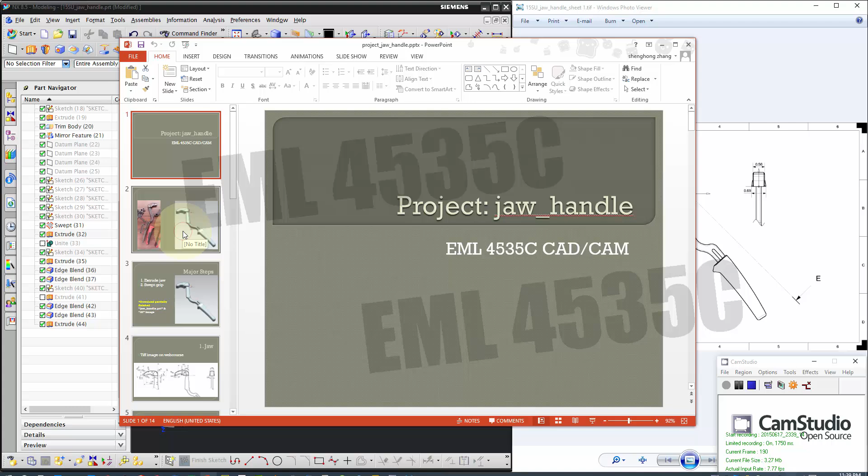Okay, in this video, we'll make the project part jaw handle. So that's the finished product, and we provided a partially finished part, which is this portion. Okay, so you can download this file from the web course, as well as this sketch or the drawing.

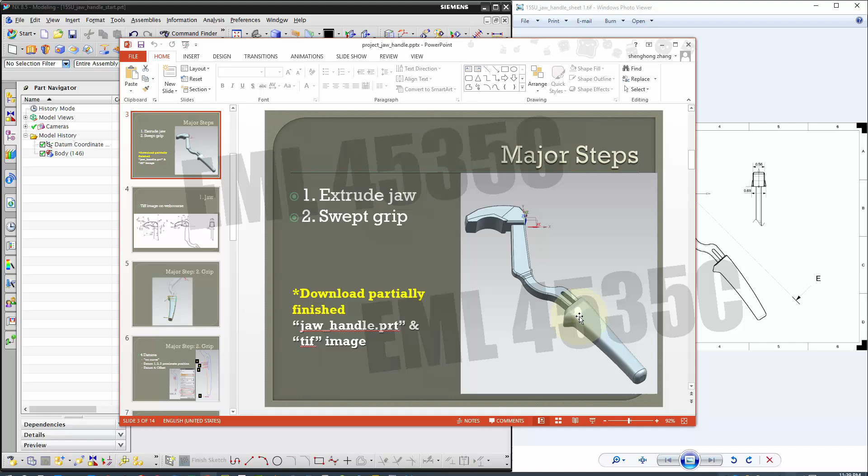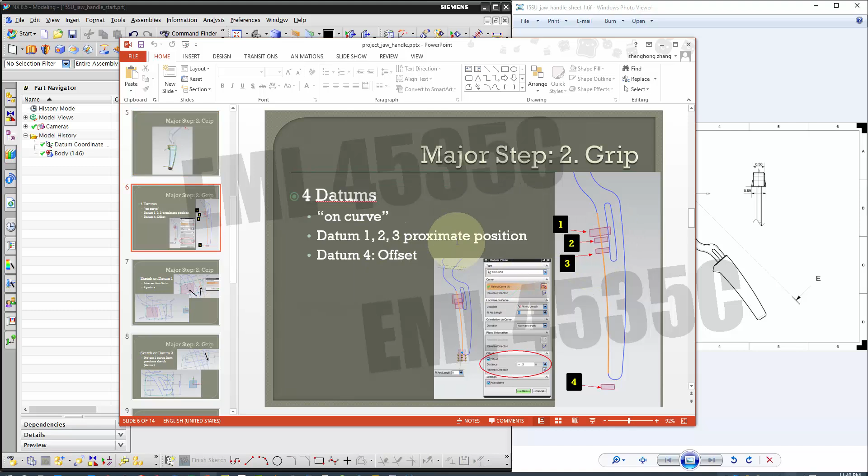So basically, what you need to do is make the extrude for the jaw and make a swept for the grip. Okay. For the swept, all the dimensions are in the slides, and the position of the datums are approximate. So just eyeball it. Okay. And let's start with the extrude on the top.

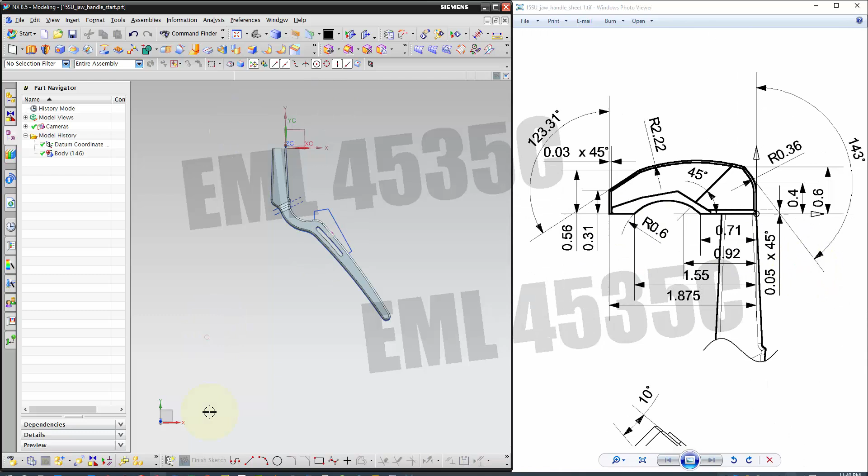It's a little bit messy on the dimensions, so we have two views to spread them. And as usual, we're going to start with a sketch on XY plane. Alright, so as you can see, this is the finished portion. Don't worry about that. You're going to start from the origin. Profile, and let's take a look.

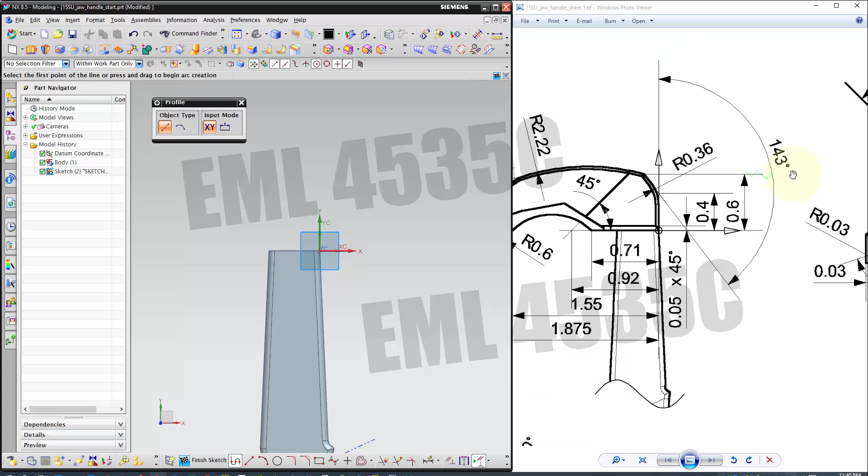We have, seems like a straight line going up and intersects with this line, 143 degrees, and there's a fillet at 0.36, then goes into an arc, a straight line, and straight line. Then you can add this piece later on. So I might start from the left side. So 1.87 is the total. Let's see, we can say 1.875.

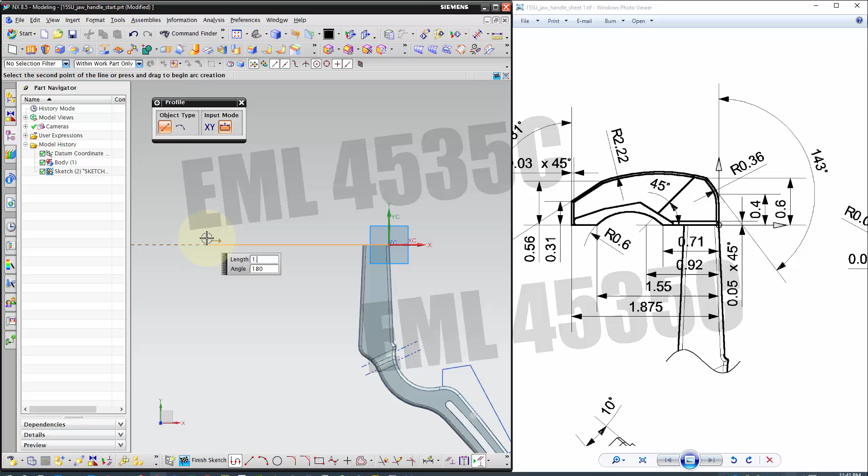Then go straight up 0.31. Then go this way, which we do have an angle 123.31. So I don't know how long, but I know the angle. Well, maybe just drop it first. Then there's an arc, so that's not tangent. I'm not gonna use profile. I just use an arc tool and avoid tangent constraint.

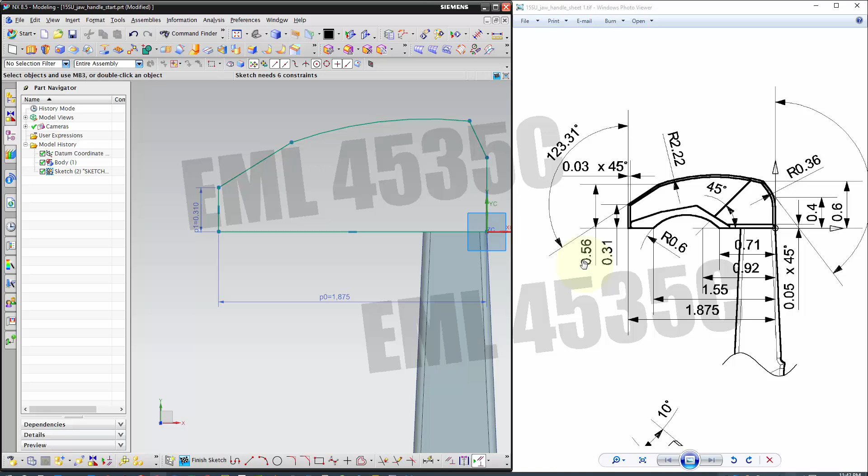Then here we have two straight lines, and their corner is gonna be trimmed away using a fillet. Okay, so now we can add more constraints, more dimensions. Then just use infer dimension. This we have 1.875. Then straight up we have the height 0.31. Then this 0.56 is to this angle line.

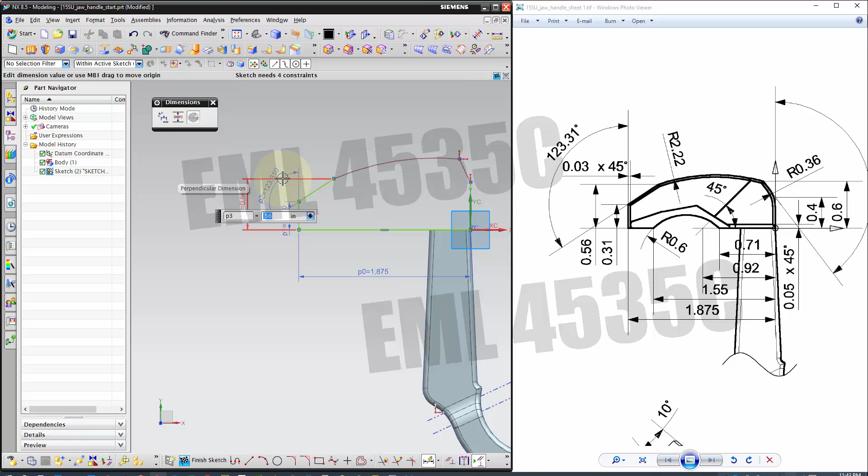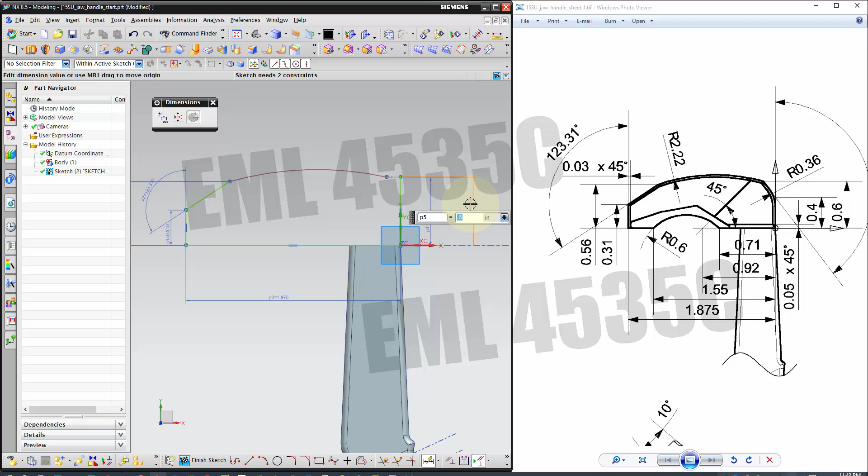So we'll put this angle first, 123.31. Then the distance from that point to the bottom line is 0.56. Then we do have the top two curves not constrained, so this height is 0.4. Then from the end of the arc to the x-axis is 0.6. Then lastly, there's an angle here, 143. So we want degree here is 143,

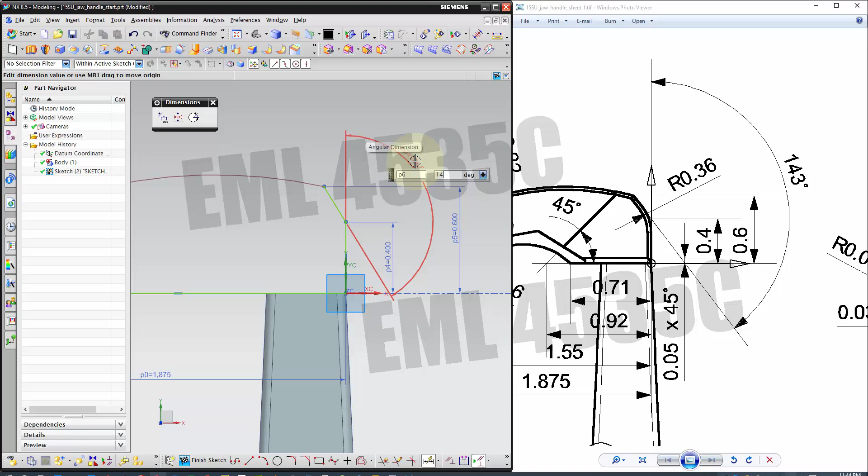and let's see, the line seems really short now, so let's go back one step. So it seems like we made one dimension wrong. Yeah, so this one should be 0.4. That is 0.6, and the angle between them, infer dimension tool, 143. Okay. The last one is this arc on the top. The radius is 2.22, and as you can see, this is all constrained.

Now we'll find this reference line, 45 degrees. So there's a line coming down here. We'll just overshoot. Okay, then we use infer dimension tool. 45 degrees, and the intersection point, we can trim this away first. Next step, we use infer dimension from this point to y-axis, is 0.92. Okay, that's it for the reference line.

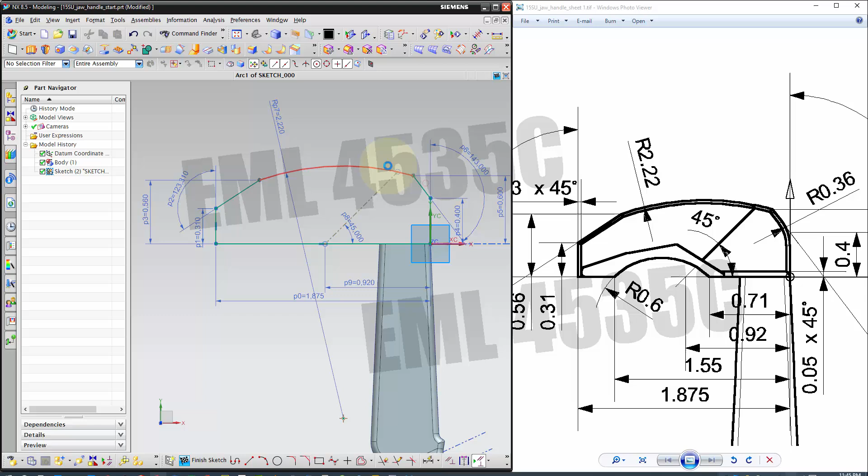So we'll turn that to reference. Then we can make this the binding parts, okay, for the jaw. And now this, we might need to look at this one. So first, let's find the starting point. It's 0.71 inch. Okay, so that's an arc, which is 0.71 inch away from y-axis, 0.71, and the other end is 1.55. So this might need to go a little bit lower, 1.55, and we'll drag this down a little bit.

Okay, then the radius, 0.6 inch. Okay, then the top portion, so we can take a look at this view. So 0.03 from the left side, go straight up. We do have a fillet there. Then on the other side, 0.03 going up, straight line at 0.58 from the y-axis. So pretty much like this. It's going up. Then the profile tool is better that way, going down a little bit, then touch the bottom.

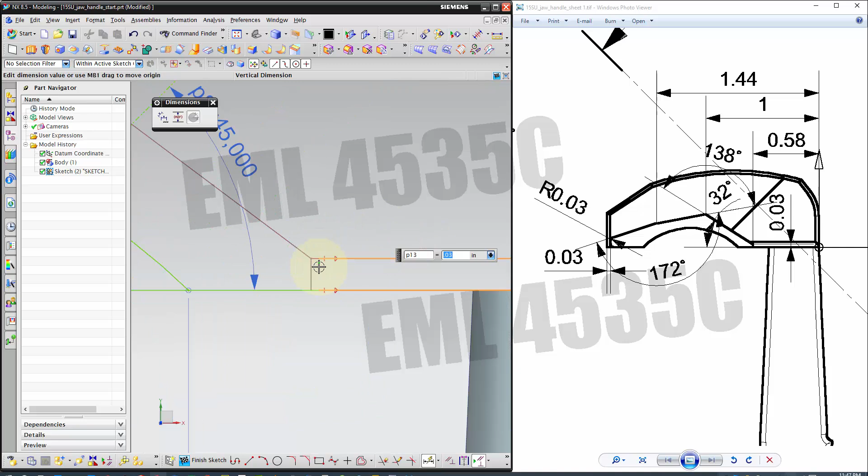Okay, then we use the infer dimension tool. This height is 0.03, then the distance from this line to the origin or to the y-axis is 0.58. Then we have 32 degrees from this line to the bottom line. Okay, you could put it here also. Then the top line is 138 to this 32 degree. So between them, 138.

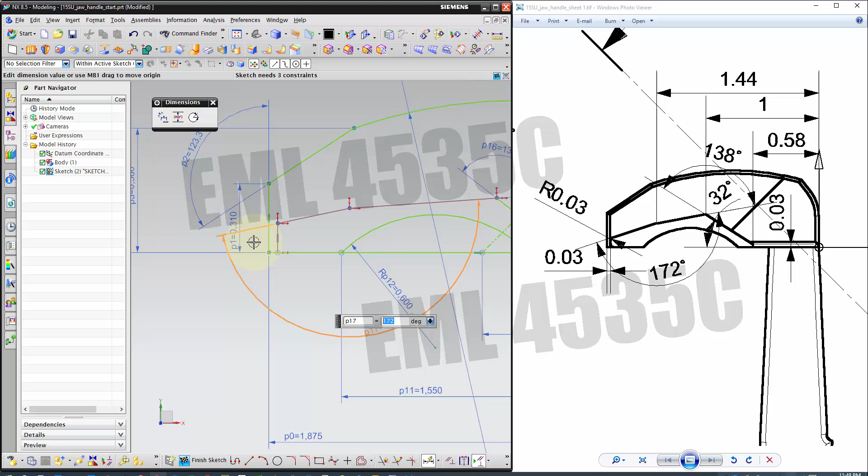And the last one, from here seems like between those top two lines, it's almost 180, so 172 degrees. And between the left to this line is 0.03. Okay, and we're still missing something. It's the top portion here, 1 inch from this point to y, and also 1.44. So from here to again 1.44. And something's not right here.

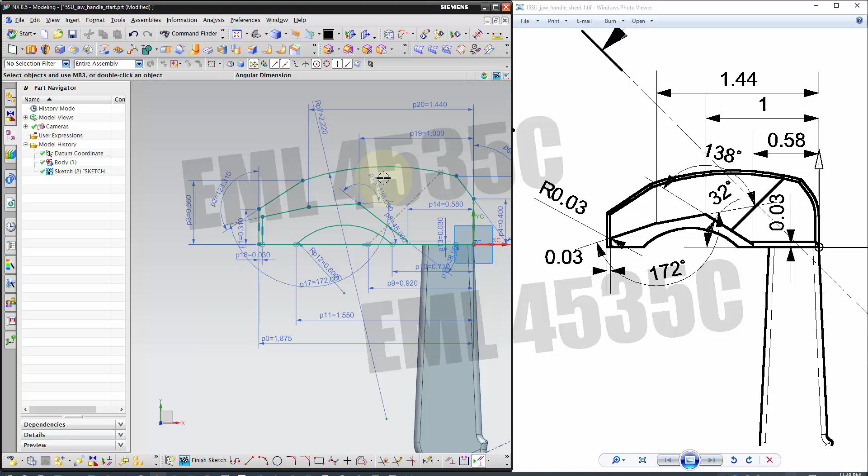So let's see, 138 is between them, and 32, 45. Okay, this should be 32 here. So that's why. Okay, that's 32, not 38.

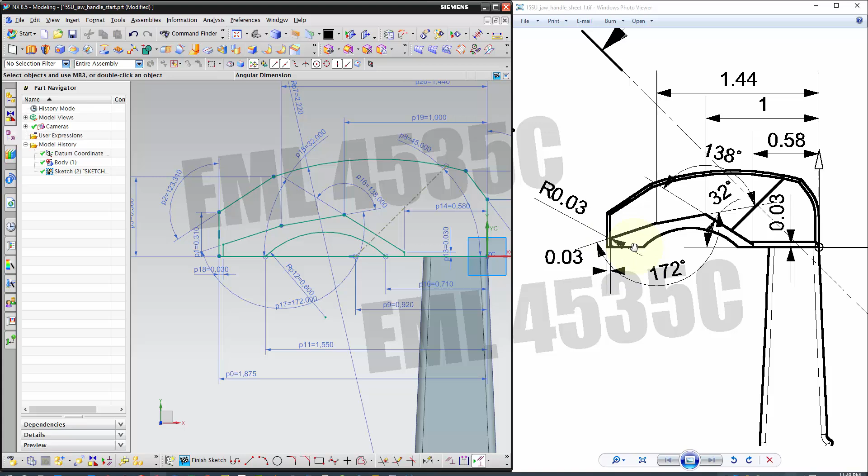All right, next here we have 2 round corners. You can do that using Edge Blend, or do it here in the sketch. All right, now I'll use Edge Blend. So my sketch is finished. Then how much I need to extrude? That's 0.56 symmetric for the bigger one. Then the smaller, the jaw portion is 0.69.

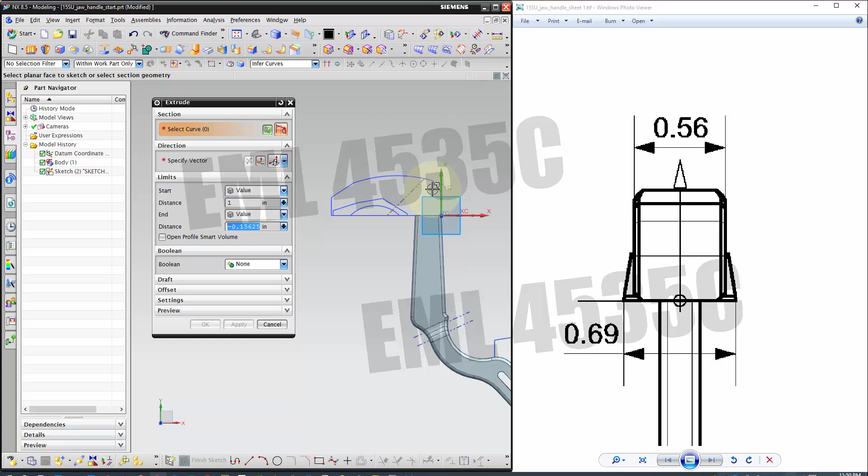Okay. Then we'll do extrude and extrude the bigger portion first. So I need region boundary curve. For this portion, I'll do a symmetric 0.28, which is half of 0.56. So apply, then we can take a look. Then for the next portion, this portion is also symmetric, 0.69 divided by 2, and okay.

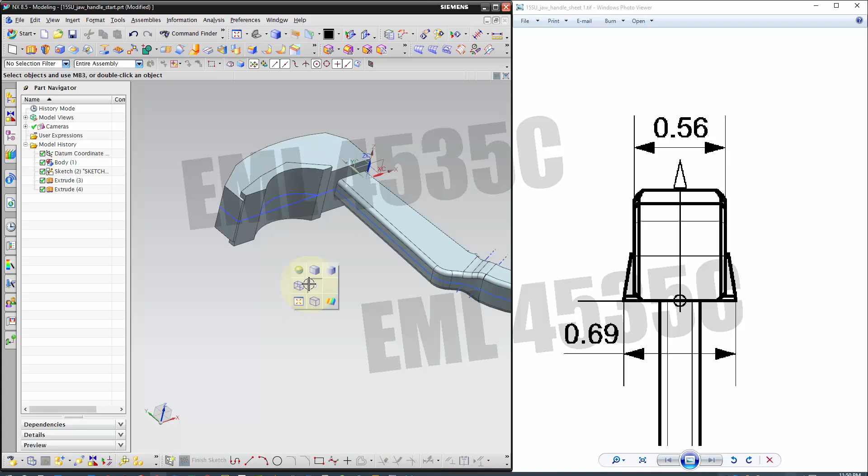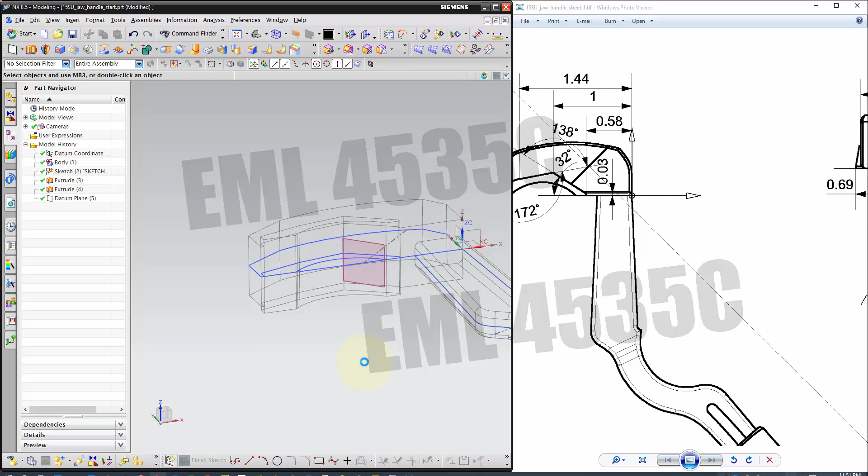And again, this head is tapered, so you want to build a datum on the reference curve. This way you can get a cut like this. So we need a datum plane, and we can just use Inferred and select this line, the end point of this line. It'll automatically give you a datum that's normal to this reference line. Now we'll say OK. So next step, we can draw a sketch on the datum.

Once you pick the datum, your sketch origin will be far away. If you like to, you can move your origin to the end point of this reference line. That'll save you one reference because you have y-axis on the construction line in the first sketch. Okay, so let's go back normal to the sketch.

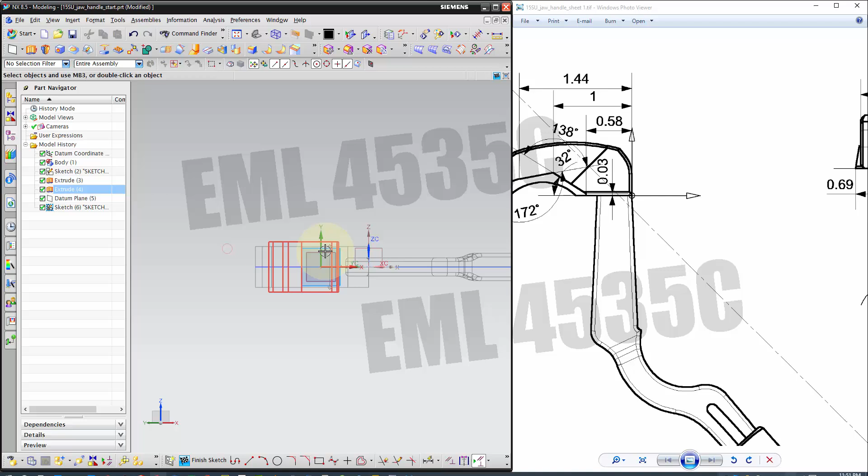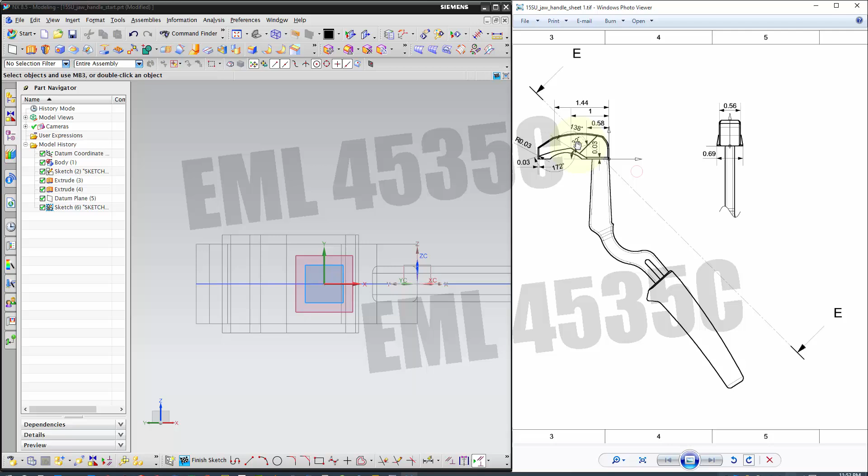How sharp the taper is, what the degree is for the taper. So that's 10 degrees in total. That's 5 degrees each side, and this cut is, by the way, from here. Cut normal to this reference line. So this way you can see the correct angle. And anyway, the angle for the top, or for the jaw portion, is 5 degrees down.

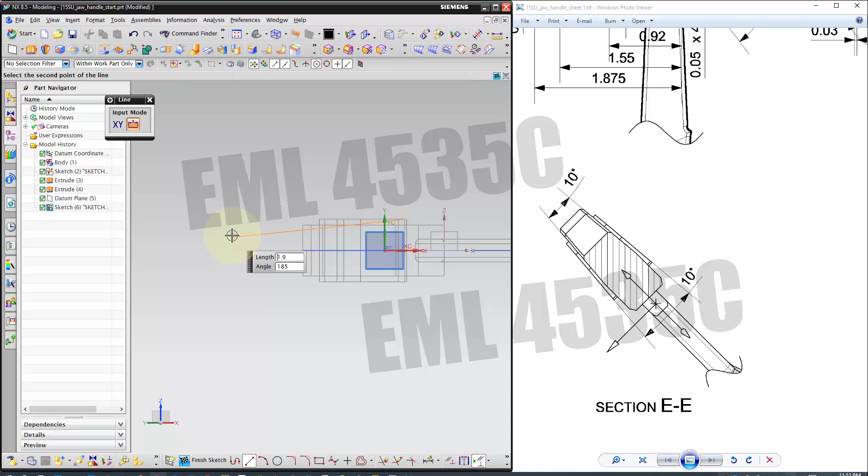So here, and the other portion is on the body, or on the big portion, and also touching the top edge. Goes down the same angle. We'll make this parallel. And also you want the starting point of this line aligned with your reference line, or the construction line in the first sketch, which is the vertical. It looks like a vertical line from this angle. Okay, so let's go back to the sketch view.

And since we put the sketch coordinate system here, you can do a point on curve. Make this point stay on the y-axis. Just in case your sketch origin is not here, you can draw a vertical reference line up and put this point on the reference line. Okay, now we still need to put the angle here, even though when we drew it, it's 5 degrees. So with the angle dimension constrained, we can just simply close the loop.

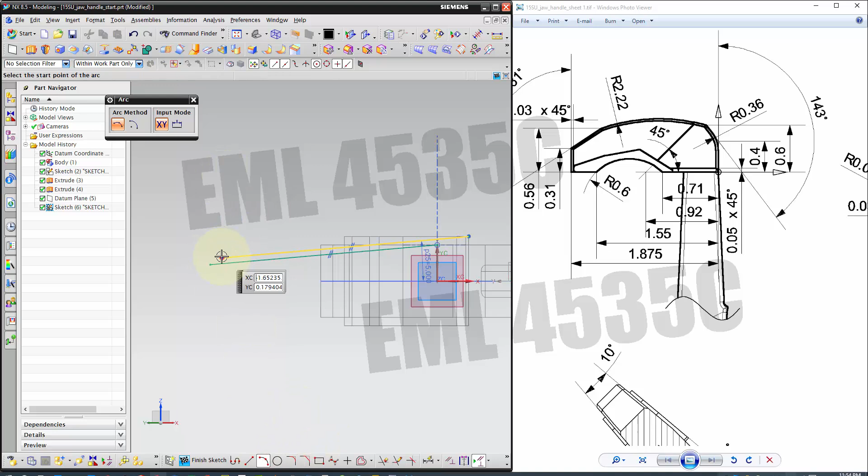And there's a little bit faster way I saw some people using. You can do a 3-point arc, so you don't have to draw a rectangle. Okay, even though it looks funny. And finish sketch. Then the top one will be cutting the jaw portion. So we'll do extrude. Then this time we can pick select connected curve and pick this arc.

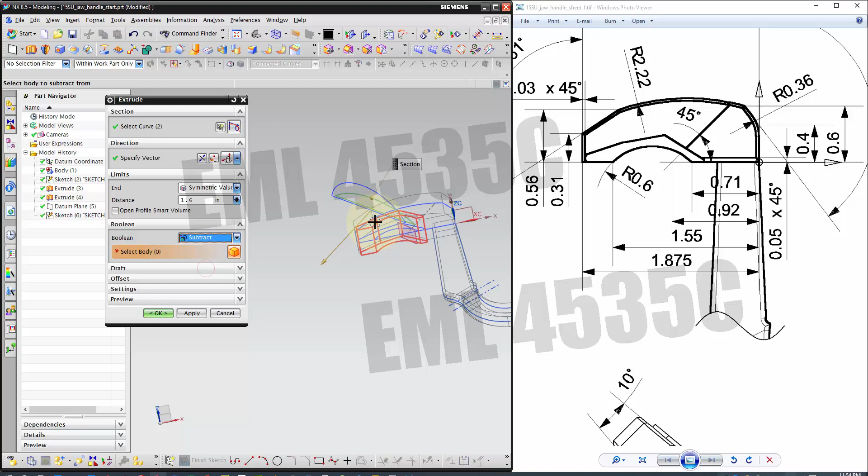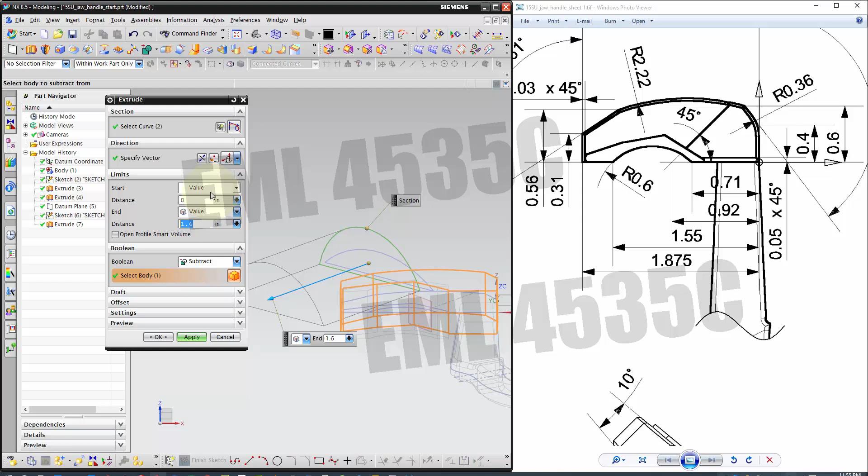And to make sure the extrusion will intersect, you want to have symmetric. Maybe not that long, but we can do subtract. Then pick this, do apply. If you want to take a look, as you can see, the jaw portion is cut. Then the body or the bulk portion, we'll extrude this and subtract for the big portion. Make it symmetric so it intersects fully. Then okay. Then we can hide this sketch and take a look.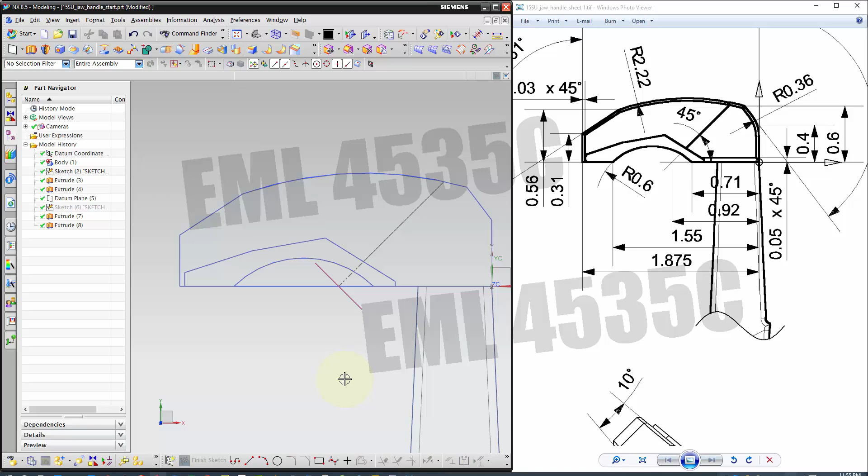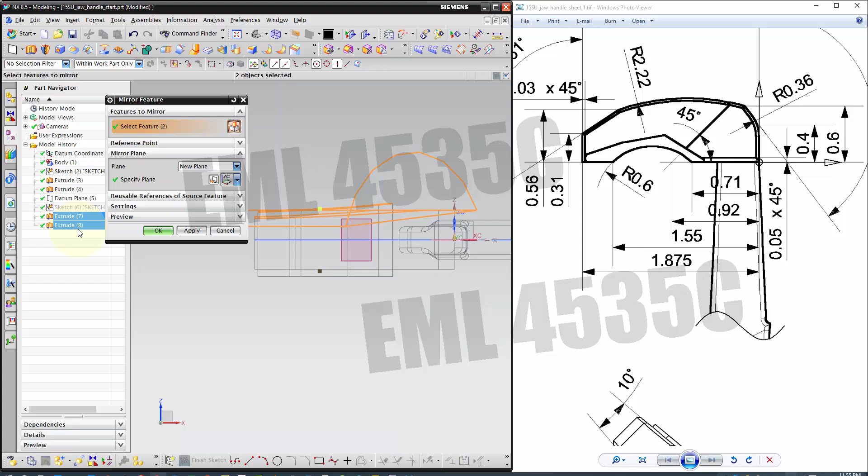And that's the edge, which should be coincident with your reference line if you look from the top. Then remember, we only did the top portion. We can now mirror these two extrudes to the bottom. So mirror feature is in associative copy, mirror feature. Then we need to mirror two features. Hold down Shift key and select both of the extrudes. Then the symmetry plane is XY plane.

So I used this before. That's the ZC icon, a symbol here. And that is done for the jaw portion. Next we'll build the grip, and that dimension is in the slides. Okay.

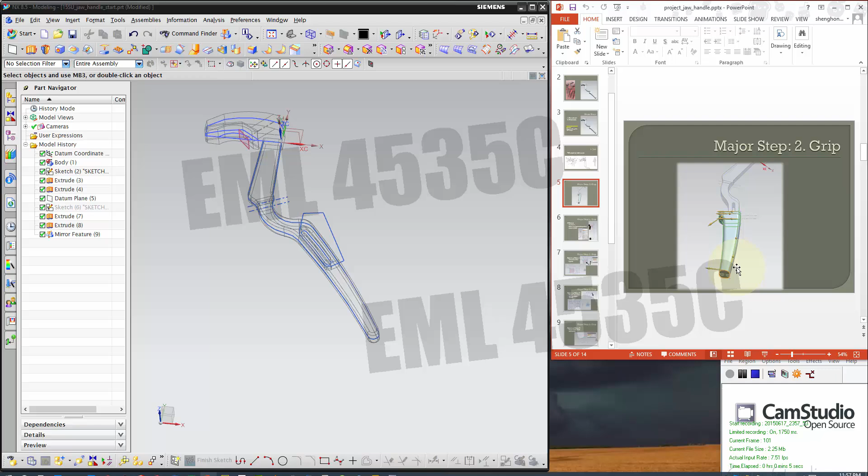All right, now the swept for the grip, and it's pretty much exactly the same steps as the previous handle. So we have 4 datums. One of which is outside of your sketch, and for the first 3 datums, you can just eyeball it. I don't remember where they are now. Just eyeball the datums. You can adjust the datums after you make the swept. Then you will actually be able to see how the shape will change.

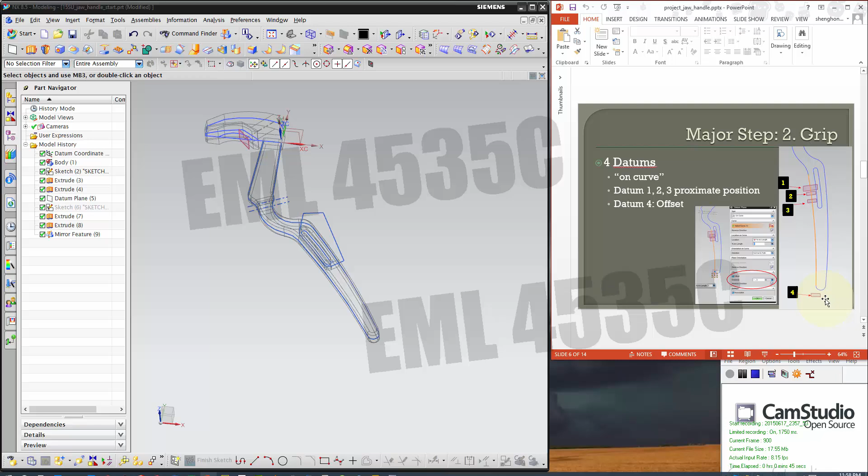Okay, and for the last one, we have that offset set to minus 0.3 away from the curve. So the datum is on curve. Then let's hide some stuff. Okay, we can hide the solid body. Then we can also hide this.

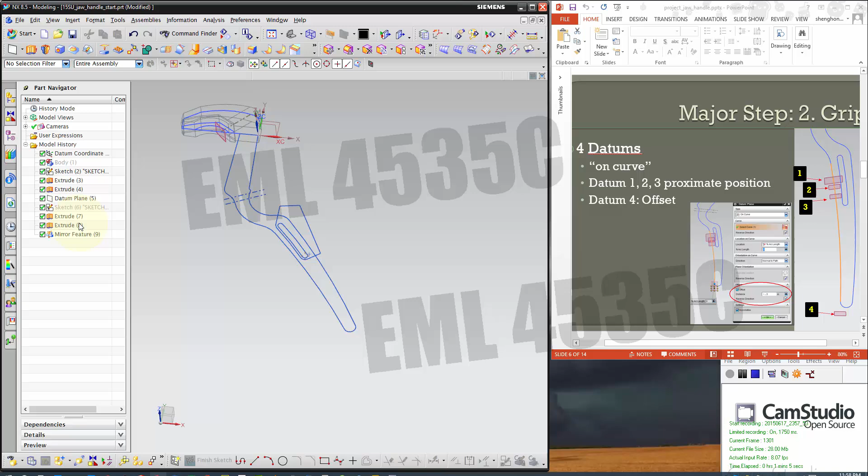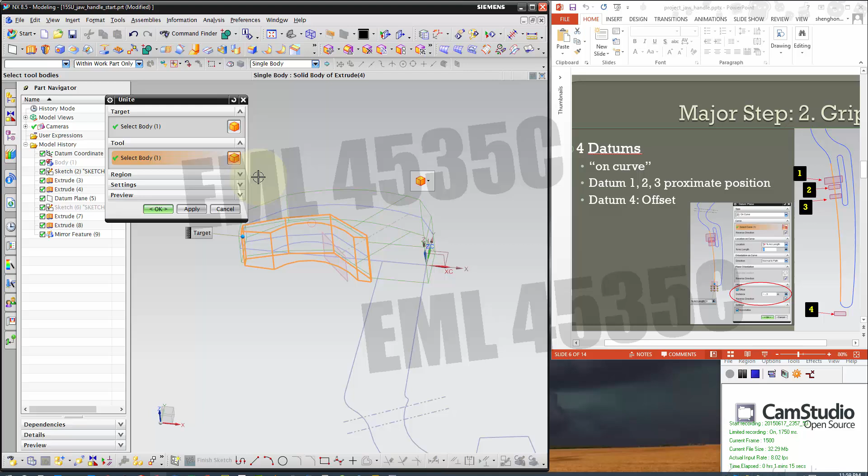Oh, by the way, we haven't united those 2 pieces yet, so we can do a unite for the jaw portion. Okay, just leave it. And I think I forgot to do the edge blend here. Okay, 0.03 for the edge blend.

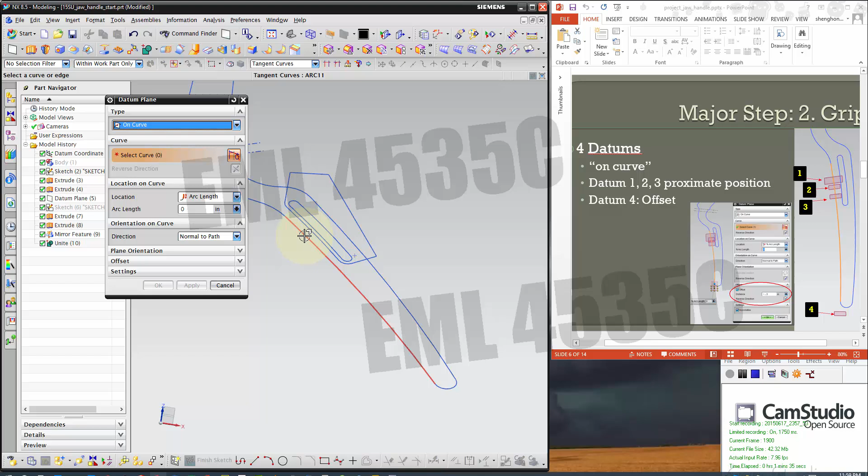All right, now the sweep. The datum is on curve, so we'll pick on curve, and this is a curve. And as you can see, the first one is about the middle of your slot.

So we'll just start from here. Maybe 4%, which is not good. Let's do 4.2% or 4.2 inch. Okay, that's on the arc length. So that is for one.

Now we do a second one. Look from the top. Okay, that looks okay. Then we'll just give this a go. Then do the next one somewhere here.

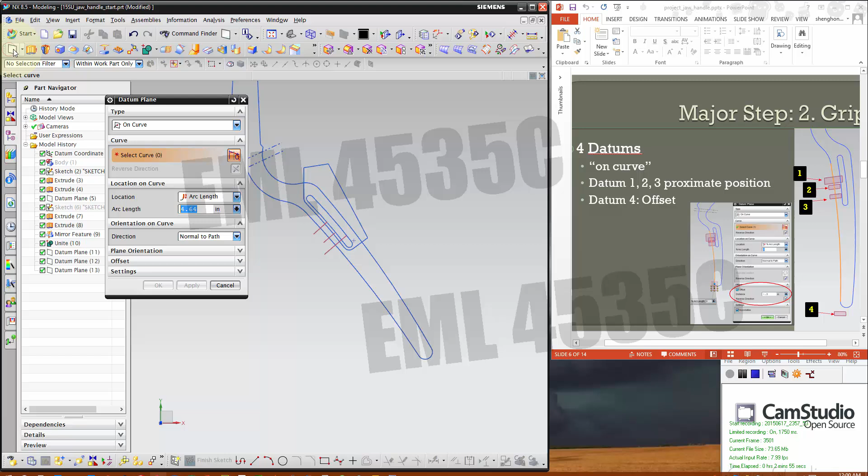So we'll build first on curve, not tangent, use a single curve. So pick this curve, and we'll pick percentage. So this one will go to 0%. Okay, all the way to the end.

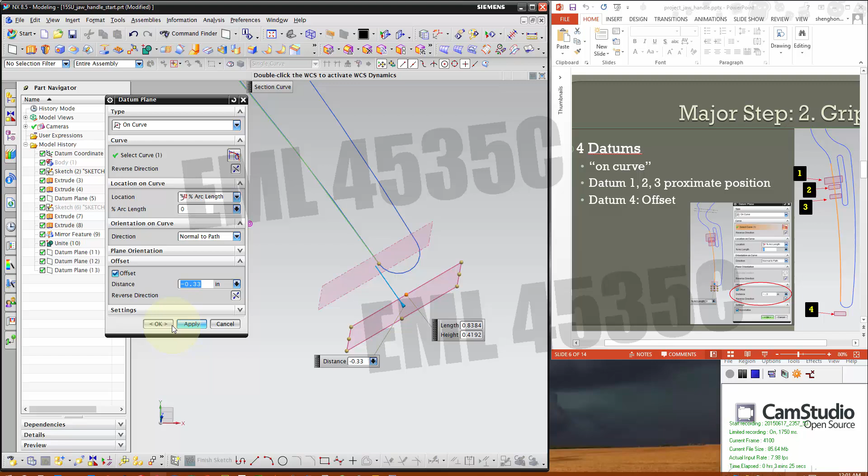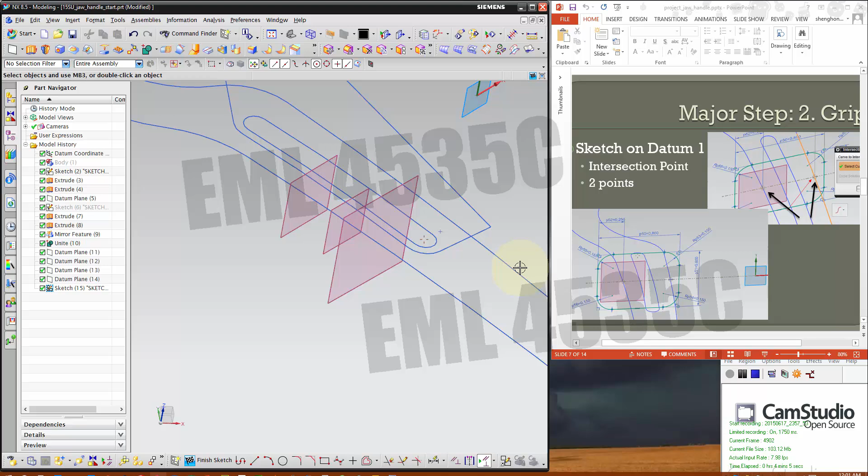Minus 0.33. Then next page, the first sketch on the first datum. Alright, so we'll make a sketch on the first datum, and as you can see, my sketch origin is far away. It doesn't matter because we're gonna use the projected point or intersection point. So just to have a sense of where we are, I'll just draw from the 3D view here, and we have a rectangle which is 0.8 by 0.6 with some fillets.

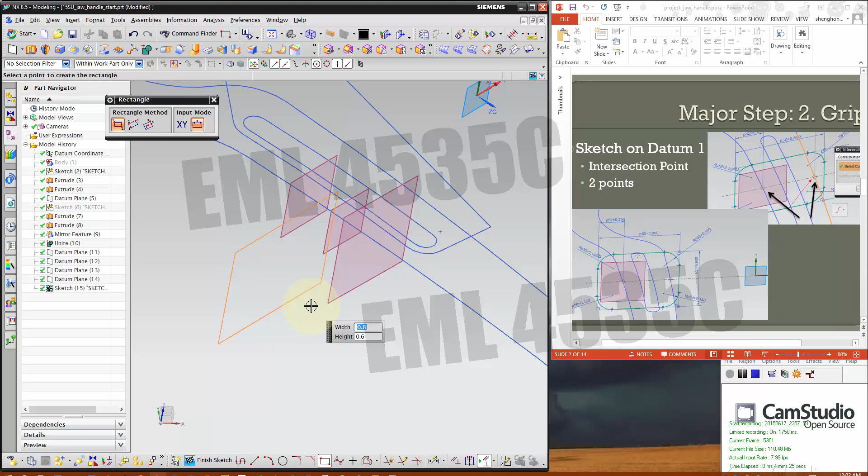So we can just drop this anywhere. The width is 0.8. Typing, don't move like cursor. 0.6. Okay, and that's the size of your rectangle. Then we can drag it around.

Then to find the exact position, first we might want to use a midpoint constraint, but before we do that, we should finish the fillet first. Otherwise, it's gonna delete our constraint. So 0.15 for the fillets.

This point, this, and that. Okay, so that is done.

We'll select this vertical line and select the origin point, which cannot be selected. So we'll just open this geometric constraint, pick the vertical line, pick a second item, and select origin.

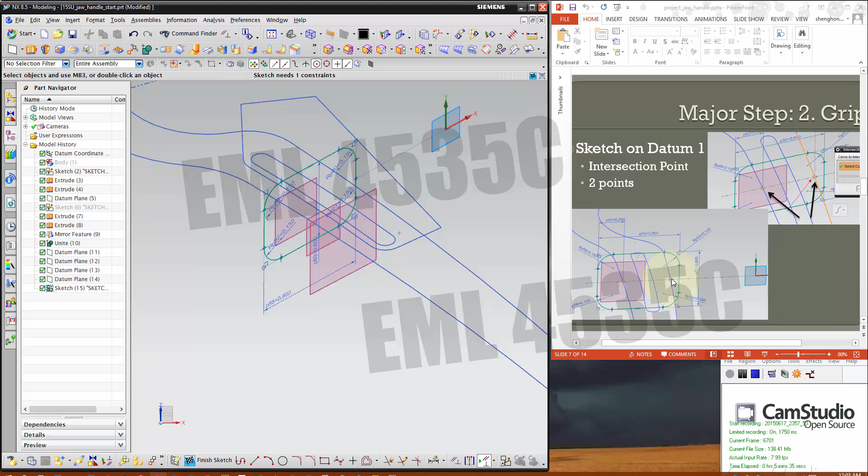Okay, that's it. Then we have two intersection points, but actually if you take a look, the dimension is only on the left one, so you might not need to use this point on the right side. So anyway, let's get an intersection point for this curve.

Okay, as you can see, we have one point there. We'll turn to black background, so that's the reference point, and we use infer dimension for this point to the vertical line on the left side, which is 0.25 inch, and now everything is constrained.

Okay, so that's for the first sketch. So we can hide the first sketch, hide the first datum. Now we're doing the second datum.

Okay, so on the second datum, we need to project the first curve from previous sketch, which is the one we just made. Okay, so this way you can align the right side within each different sketches.

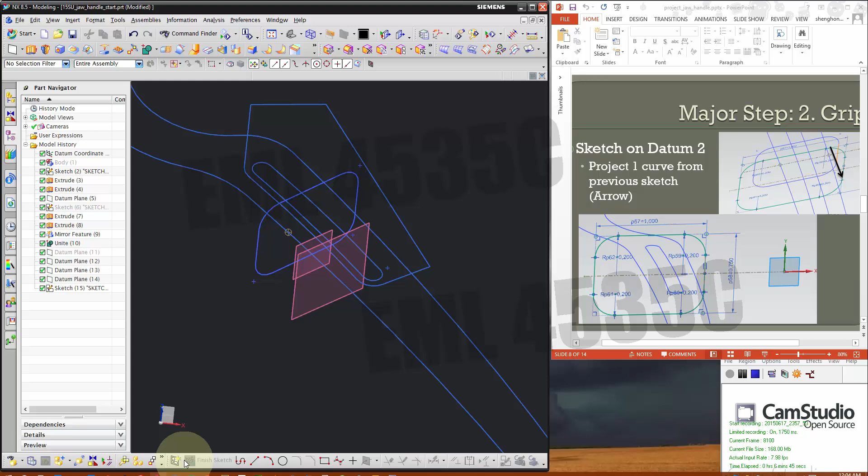So we need to first create a sketch on the second datum. All right. Then second, we need to project. All right. Anyway, get that sketch from the other. Get that curve from the other sketch. Single curve. So you want to use single curve and select the curve.

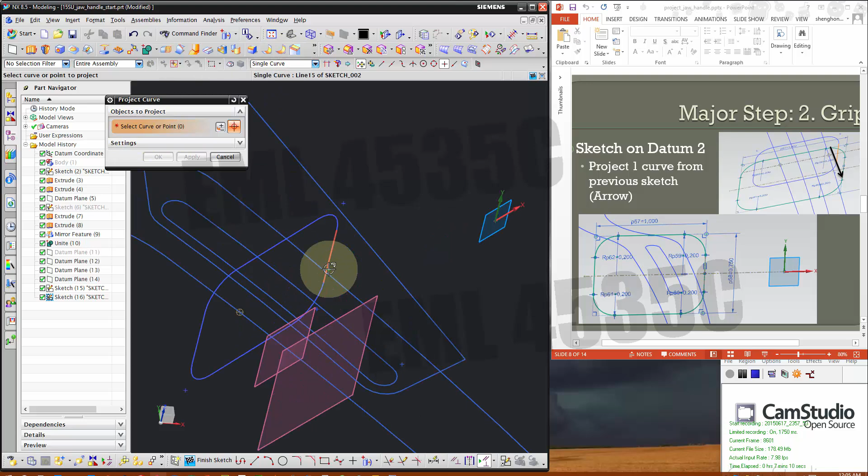Now it'll be projected into this sketch, and you can tell from the color. Then we're done with the first sketch. Just close that. The next we'll do rectangle with fillets.

So let's randomly drop this first. Width is 1 inch, height 0.75, and the fillet is 0.2 for all 4 corners.

Finish. And since we have the fillets already done, we can apply the midpoint constraint for the vertical line to sketch origin. And also, that's why we needed the projected curve. We need to align the right side to that projected curve.

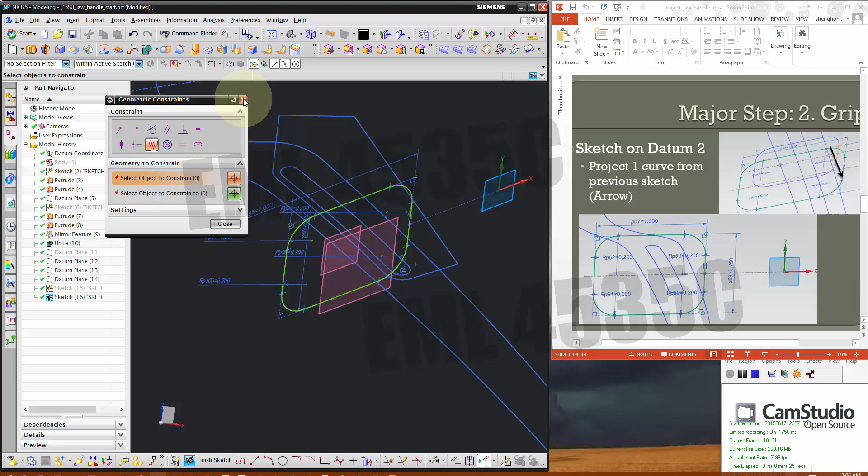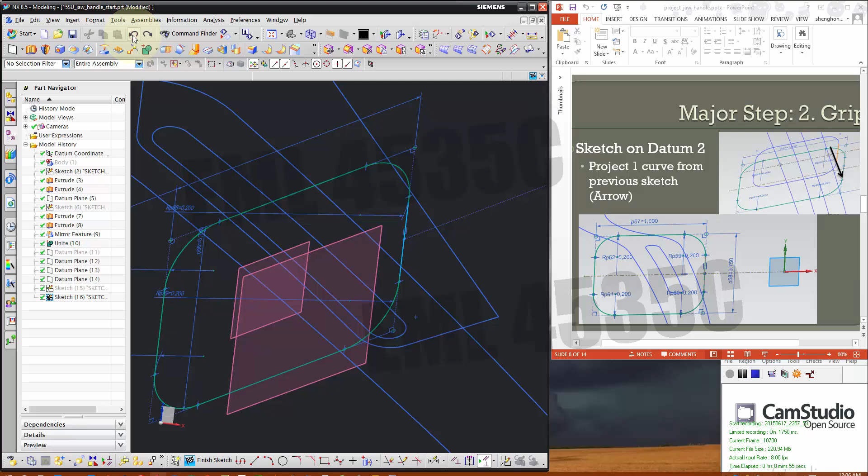Okay, and one thing is a better practice is to turn that projected curve into reference, because when you make a swept, it'll be multiple loop, or it'll be a line overlapping on another line. And sometimes NX is pretty picky on that, so it might be better idea to turn that to reference first, so that you know that's a reference.

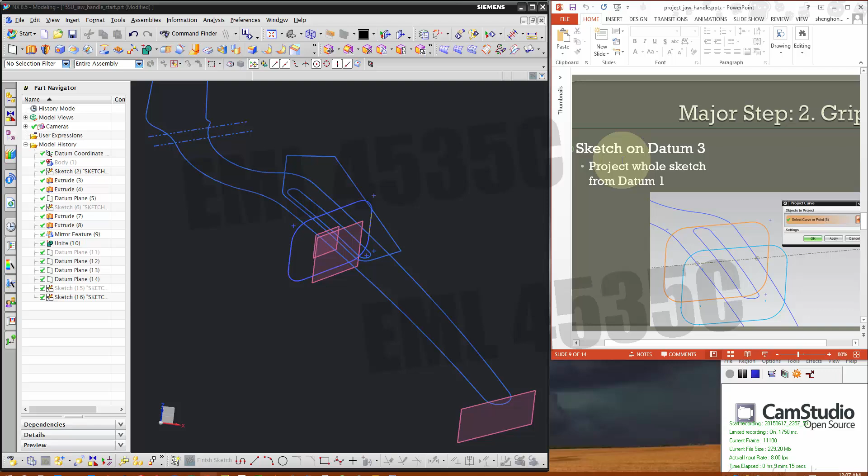Then we make them collinear and finish. Now go to Datum 3. It's exactly the same as the first sketch, so this one is easier.

We'll show the first sketch. Build a sketch on the third datum. Finish.

And what we need to do is just project the whole sketch onto our sketch. So if you click in the tree, it might be tricky because I think we selected the point as well. Let's try to deselect the point. Oh, it's not working. Then just reset.

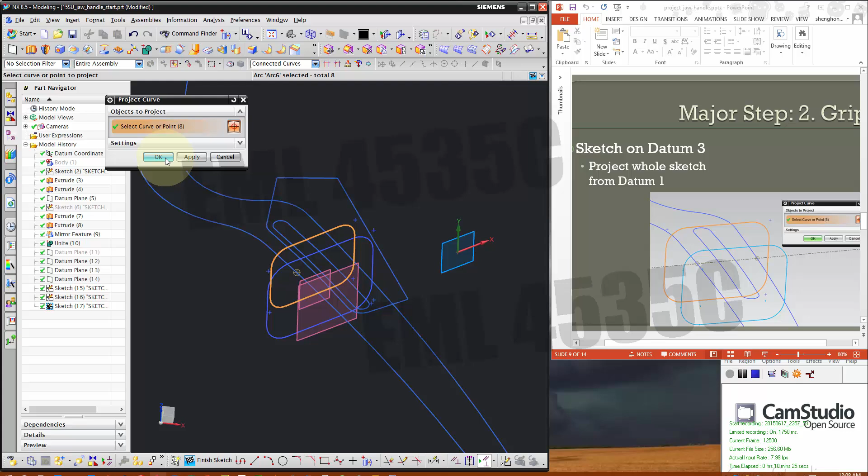Okay, so we won't pick other things in that sketch, just the connected curve, this single loop. Let's say OK - now we get the exact shape from that sketch. So that is all for Datum 3.

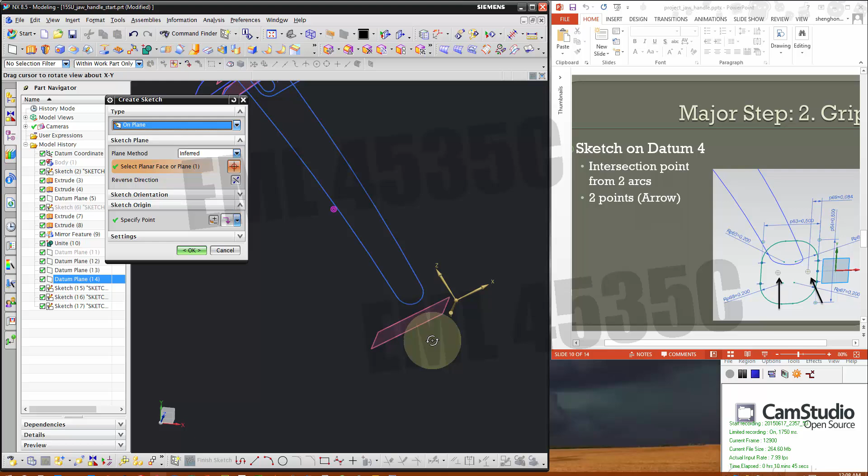For the last datum, it's getting a little bit smaller. As you notice, this datum is a little bit different - my Z goes the other way, so that caused my Y to go down. So we'll change the normal this way, so my sketches all look the same orientation.

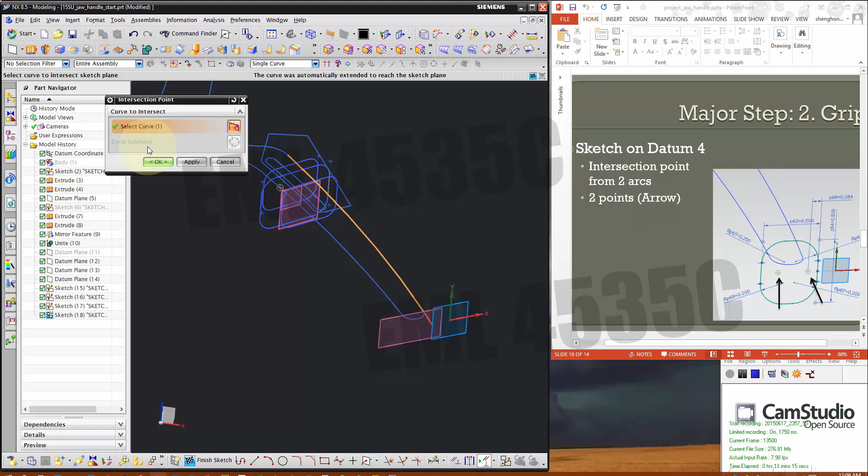So here we do need to project or get this intersection point on the right side. Get an intersection point for this curve into our sketch and turn to reference. The one on the left side isn't that important, or it's not used anyway.

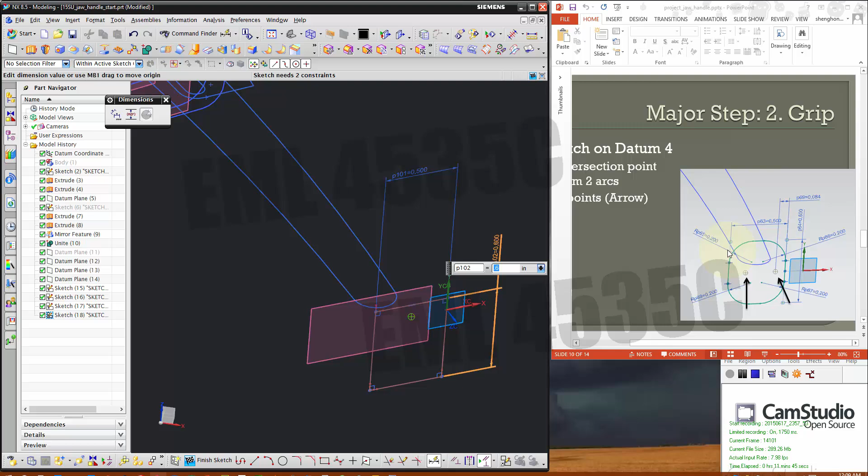And you can get a rectangle - width 0.5, height is 0.6, and the fillet is 0.2 inch.

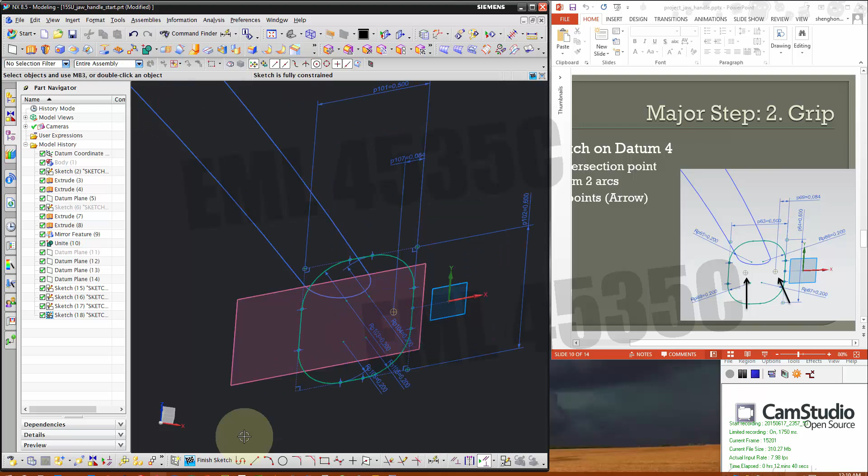Okay, finish. Then we can move this around, get a midpoint constraint on this line to the sketch origin. So you want to move in the Y direction, then we have a distance from the reference line, the intersection point to the line on the right side, which is 0.084 inch to this point. Alright, so this sketch is also fully constrained and finished.

And we're good for the guide curve, right? We have 4 sections. Next is the guide curve, and it's pretty much the same as last time - you just connect those 4 sections, and looks like this one is an arc.

So intersection four sketches - alright, this one is eyeballed as well. Then we'll just start from the top, build a sketch, and this is on XY, so you can just simply build something like this.

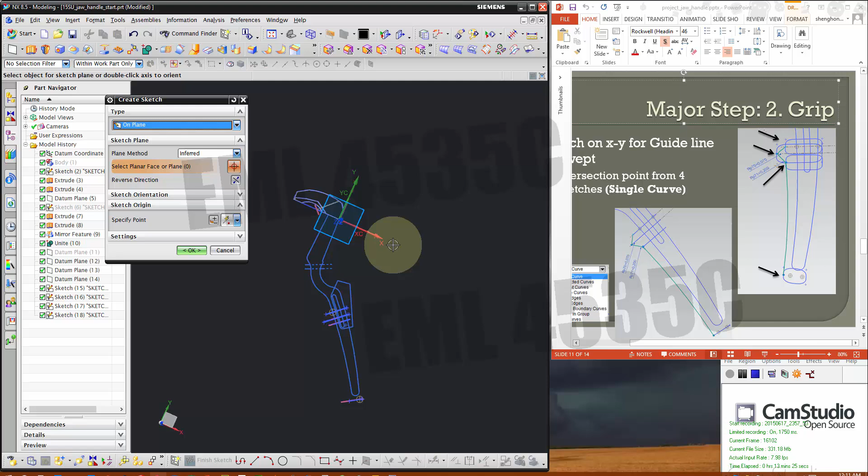Now we'll first connect these sections, and the last one, maybe an arc is better. So what I'll do is a 3-point arc from here to here. I don't want tangent, I'll just eyeball it.

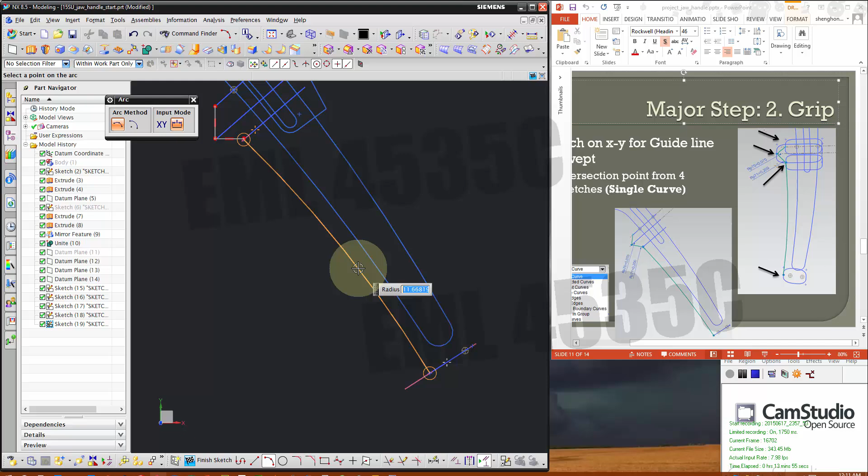Okay, if you want to constrain, just add a radius, constrain this arc. And also we want to make sure this is tangent, so we have tangent for this corner - 0.07 and 0.2. Now we can do 0.07 between these two, and 0.2 between that two.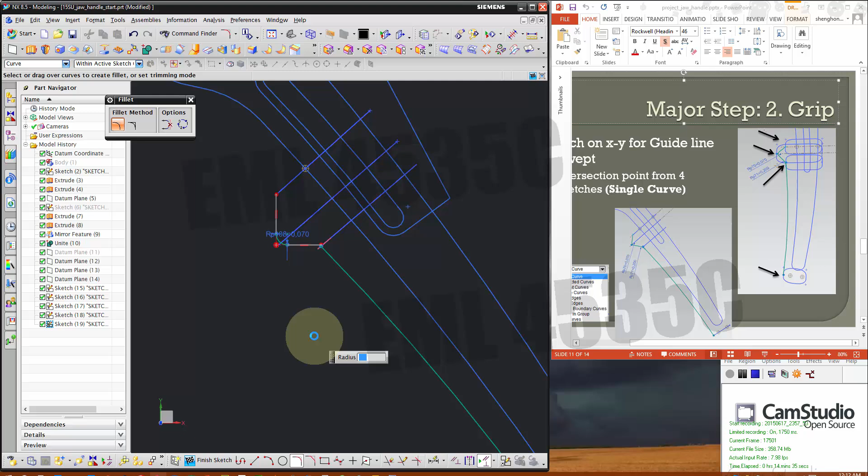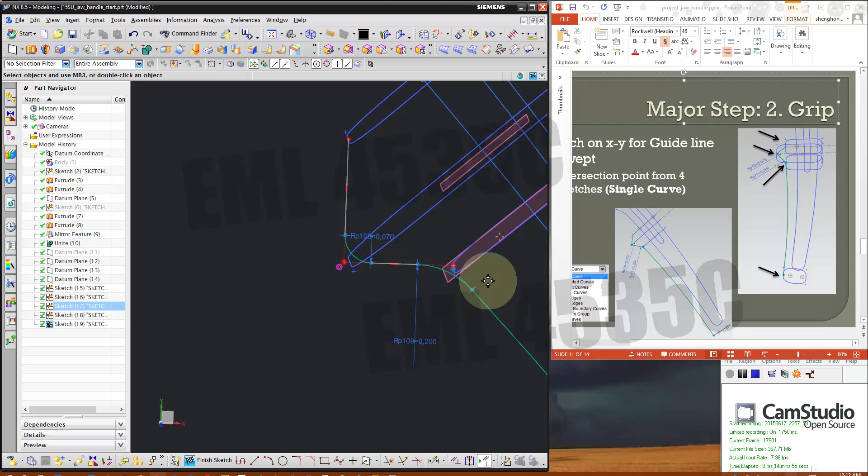I think we didn't finish the second one. Okay, and apparently when I was drawing this line, it went to a different point. So you might want to zoom in when you draw this line.

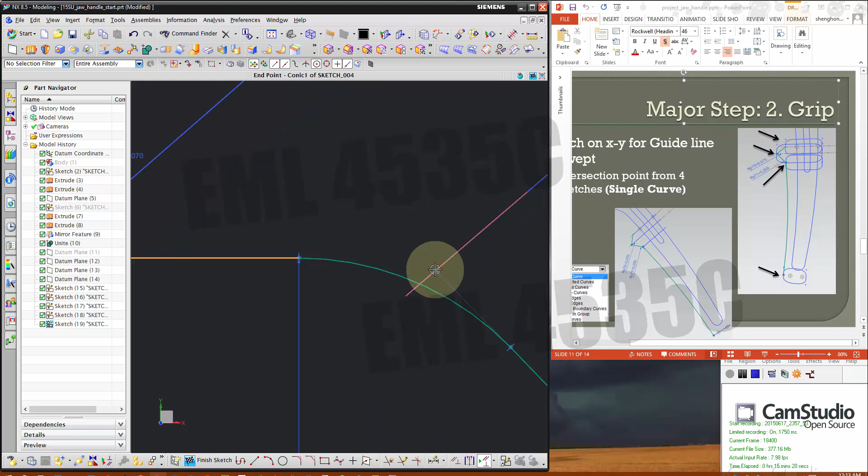Over constraint, delete that. Then we probably delete that too. Delete that point - you don't have to fix that, by the way. So that was caused by this horizontal constraint. Now we'll make this line stay on this point. Okay, so this way they intersect.

Then that is all for this guide curve. And for the second guide curve, I will just use this arc from the handle. And now we go to the sweep.

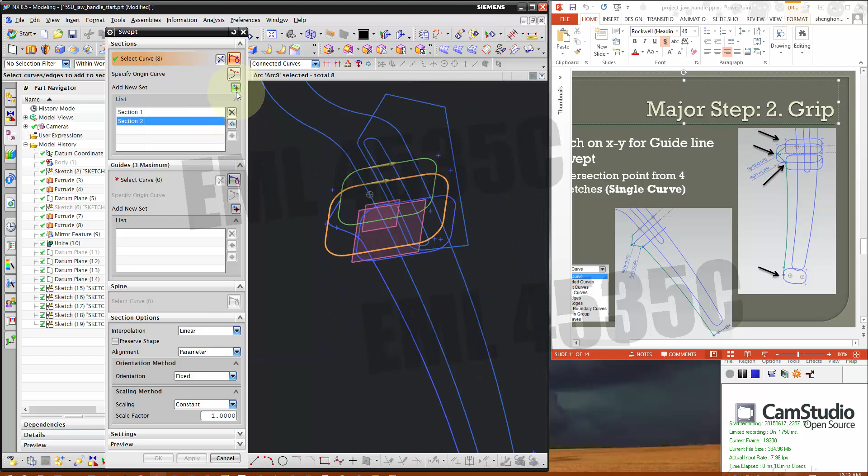Alright, so we'll pick sections, and depending on which line you want to use as origin curve - say if I pick the top line, so we'll pick the top line for the second section as well. This way they always align together. For the last one, you've got to be careful to pick the top short straight line as the origin curve.

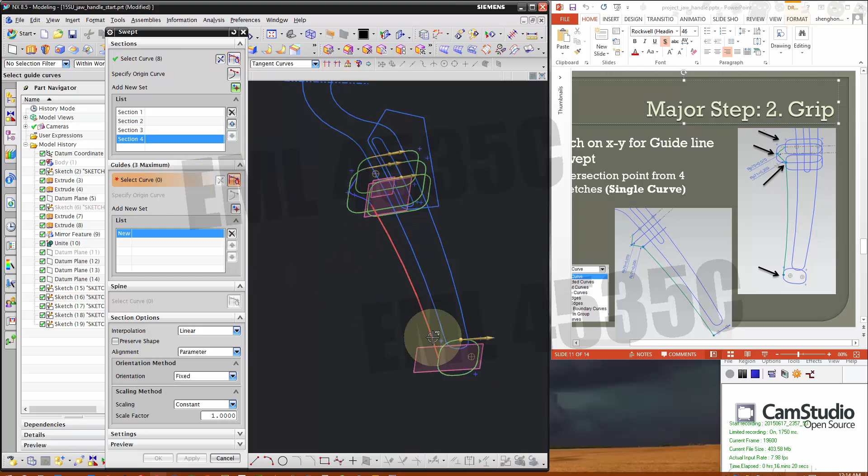Then the guide curve, we need 2, so we're going to start from the left side. Turn to that - apparently the right side is not very well. Then we need a second one. Add a new set, and don't use tangent, because everything's tangent on this sketch for the handle. You just need one single curve.

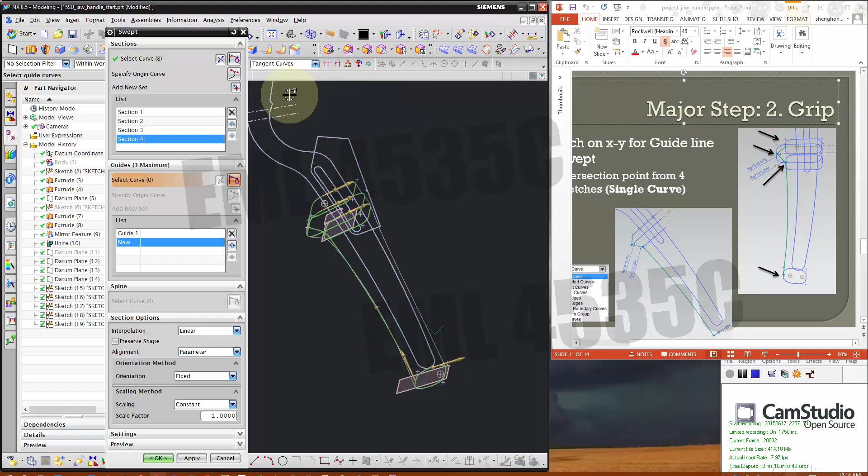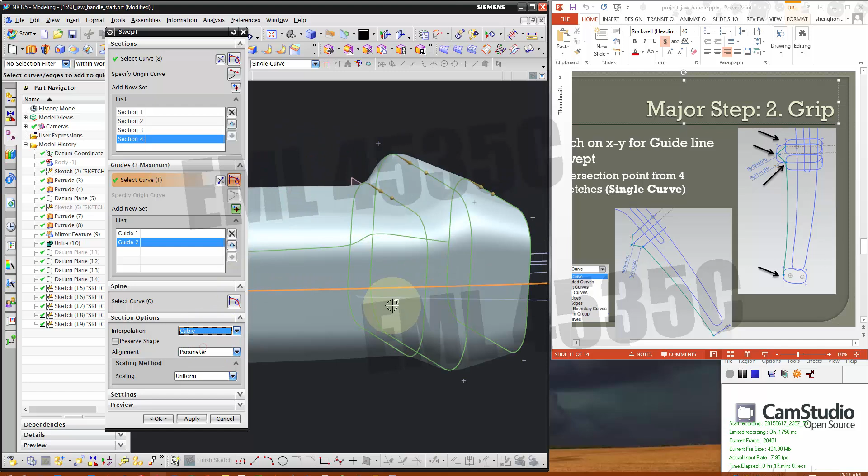So a single arc for this one, the right guide curve, and as you can see, it's much better. But if you look from the side, it's still a little bit sharp. You can change that to cubic to smooth things out a little bit, and okay.

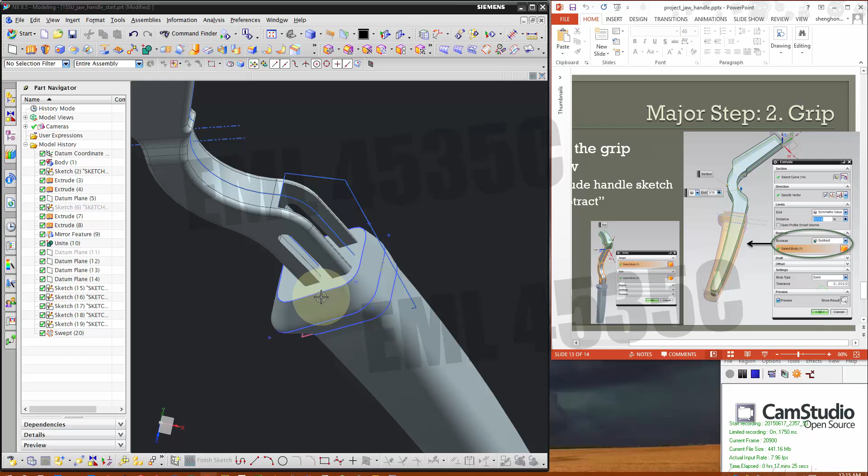Alright, so we are almost done for this sweep. Then if you show the body that comes with it, it's partially finished - we need to make it hollow, otherwise look, this is a little bit unrealistic.

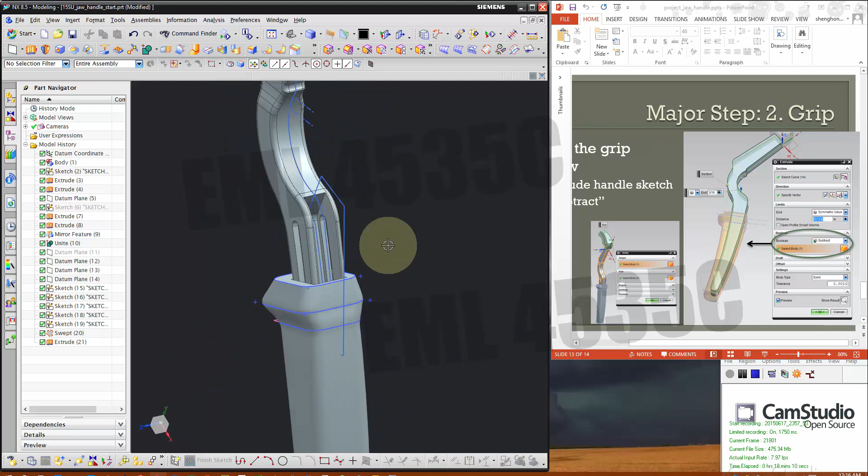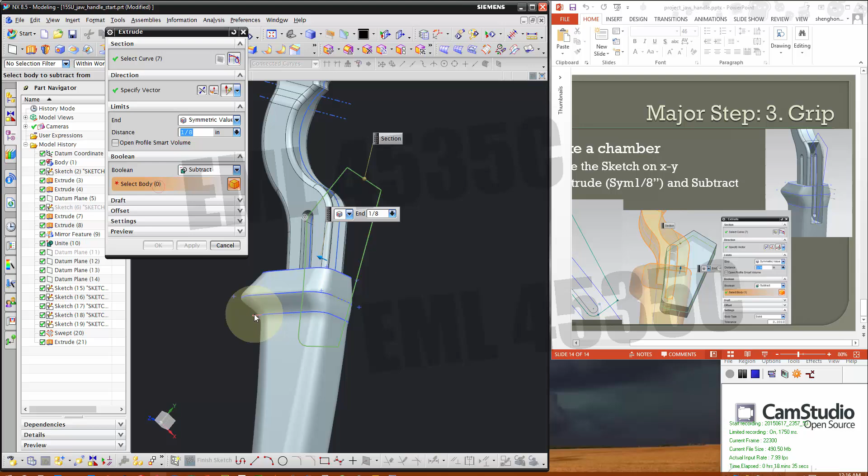And if you show the body, it's more believable. Then also there's a cut for the rubber piece, the grip as well. So the second extrude using this sketch that came with the parts - okay, so the distance is 1/8, symmetric, and subtract from the grip as well. Now this will align your grip with the cut on the handle.

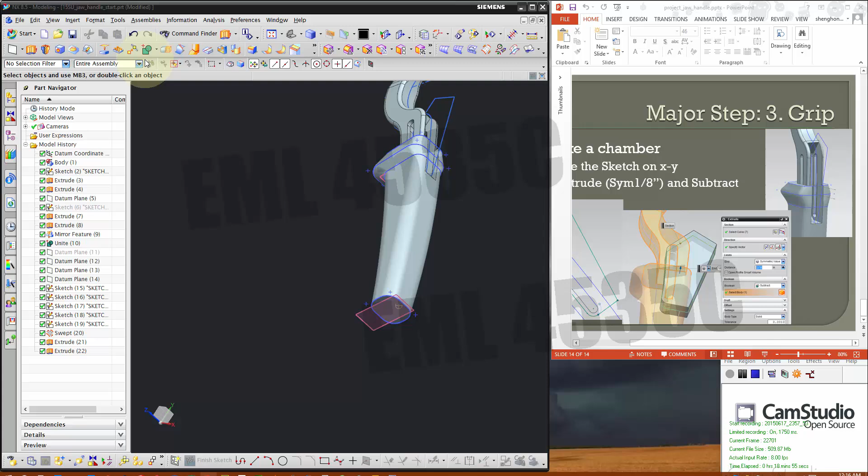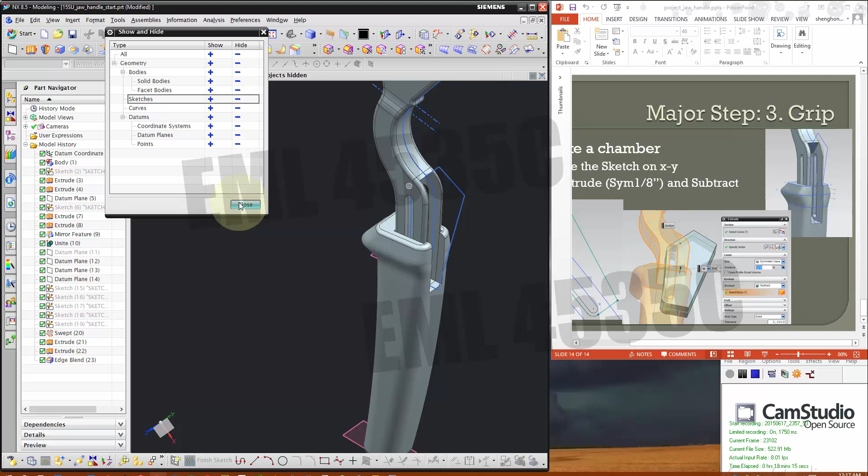Then we don't have any last step here. However, if you want to, you can use some edge blend to make the bottom of your sweep a little bit more believable, and also on the top. Say OK, and we'll hide all the sketches in here, and also curves, and also datums. Finish - so that is the last part for the project, and we'll have another short video for assembly to assemble the whole thing together.